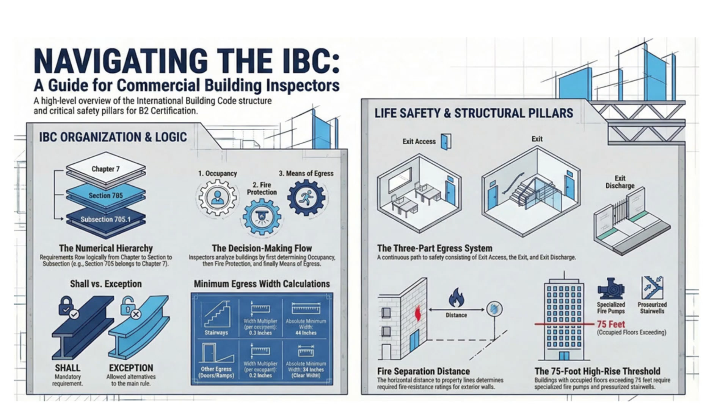The ICC B2 exam is an open book test, a format that creates a dangerous false sense of security. Most candidates walk into the room thinking the answers are easy to find just because they have the book on the desk. The International Building Code contains hundreds of pages of dense, technical language. Under severe time constraints, searching for every answer from scratch is mathematically impossible.

Relying on rote memorization is a direct path to failure. The volume of material leads to information overload, and the clock runs out. Success requires mastering navigation, understanding the logical hierarchy, utilizing the index effectively, and following cross-references.

Mike L. Turner's book, ICC Commercial Building Inspector Exam Prep B2, acts as an operational manual. It is designed to teach the code navigation skills you actually need. A targeted search strategy is vastly more valuable than a photographic memory. When the timer is running, your ability to locate data is the only thing that matters.

The IBC is structured logically. It moves from general planning and occupancy in early chapters to specific materials like concrete and roof systems later. Candidates must watch for language traps. The code uses shall for mandatory rules, while exceptions provide the specific conditions where those rules do not apply.

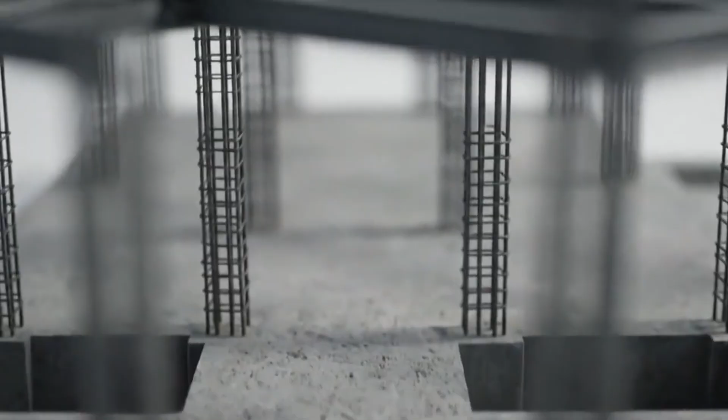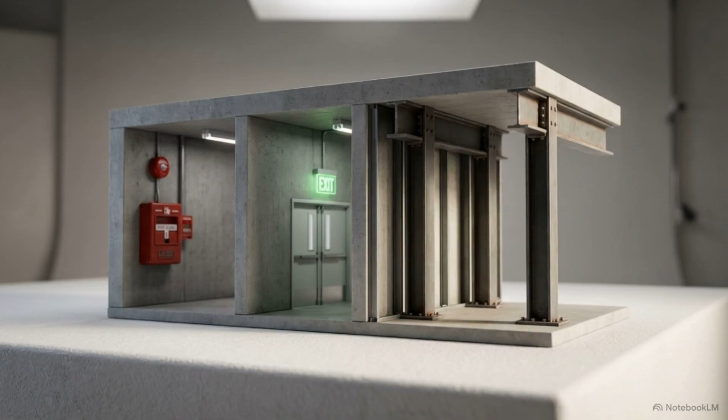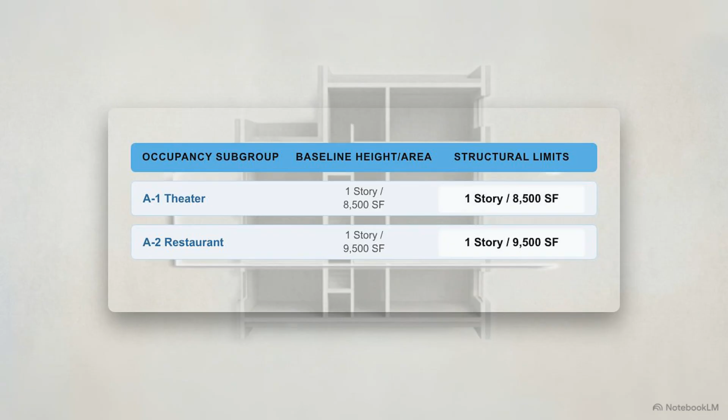Occupancy classification is the starting point for every regulation in the book. It dictates the fire risks, the required exits, and the structural limitations of the building. Small differences in occupancy subgroups can change the requirements. For example, the code treats an A1 theater differently than an A2 restaurant, and those distinctions dictate the structural limits of the space.

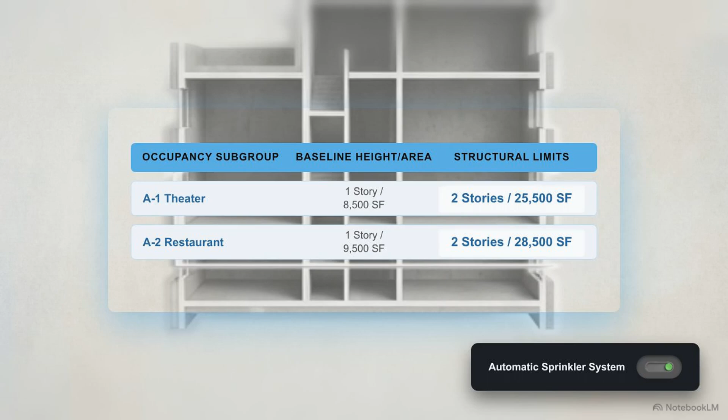Adding an automatic sprinkler system changes the math. This safety feature allows for a multiplier that increases the allowable building height and the total floor area. Calculating these limits requires mastering IBC tables 504.3 and 506.2, which translate the occupancy and construction type into specific allowable dimensions.

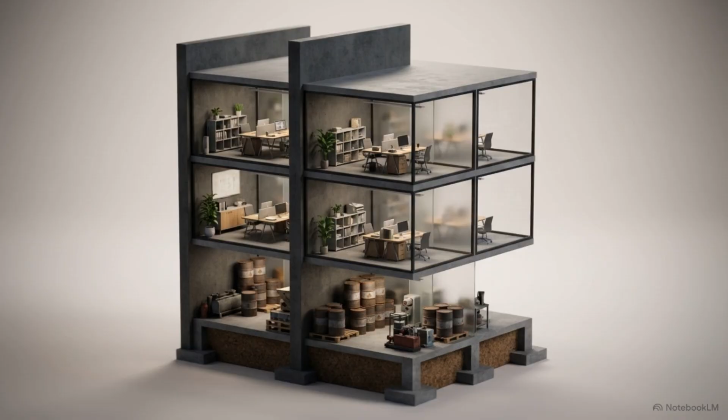In mixed-use buildings, the most restrictive occupancy rule generally governs the entire structure. Relying on field intuition instead of these rigid tables is a common mistake for test takers. Accurate occupancy classification is the mathematical linchpin for every safety requirement that follows.

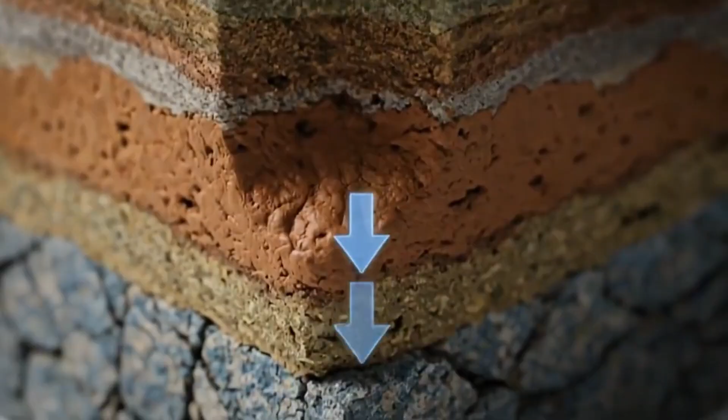The focus then shifts downward to the foundation and the soil itself. It begins with soil bearing capacity, which measures the ground's supporting strength. Designing footings requires using the allowable bearing capacity. This is a conservative figure that includes a factor of safety, unlike the ultimate bearing capacity, which represents the point of total soil failure.

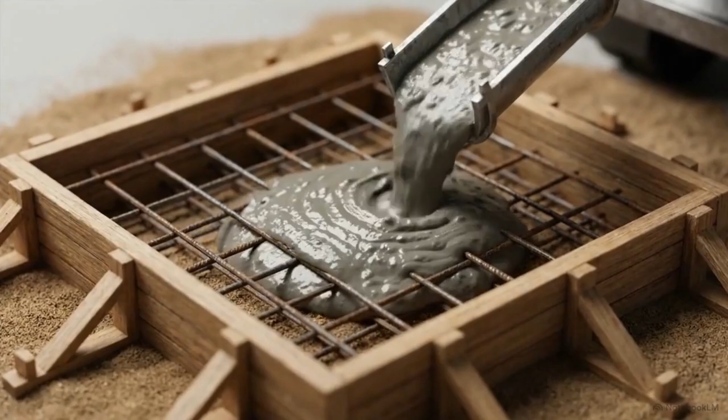Concrete strength is measured by f'c, the specified compressive strength at 28 days of curing. This ensures the material can handle the heavy dead loads of the structure and the variable live loads of the occupants. To pass the exam, you must master laboratory testing standards from ASTM that field inspectors rarely perform themselves. ASTM, the American Society for Testing and Materials, sets the specific protocols for how these concrete samples are cured and tested.

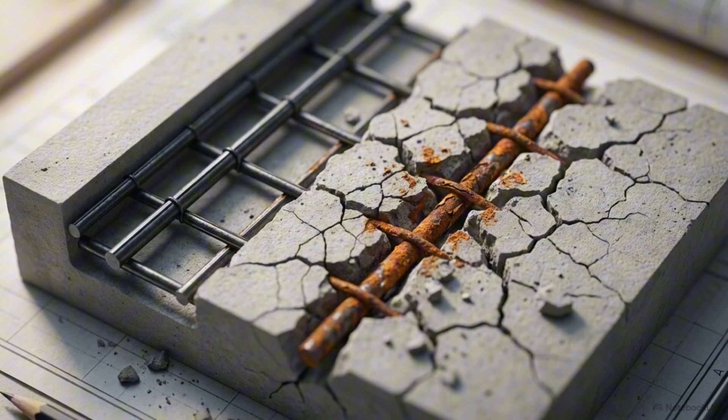There are also strict rules for rebar placement and concrete cover. Proper spacing of the steel reinforcement is necessary to prevent tensile failure and long-term corrosion. Mastering these technical testing standards and soil mechanics ensures a foundation can withstand its design loads without failing.

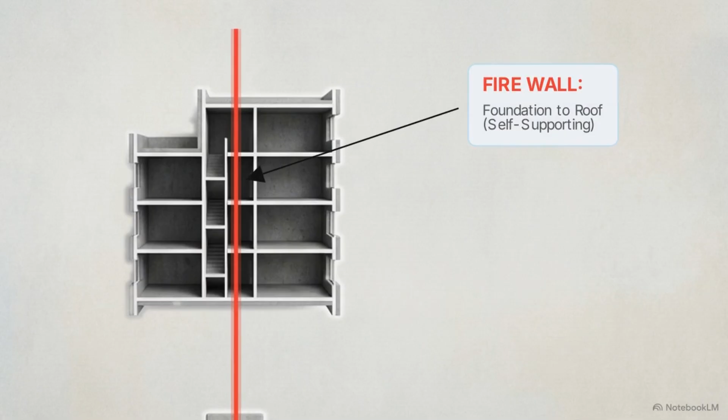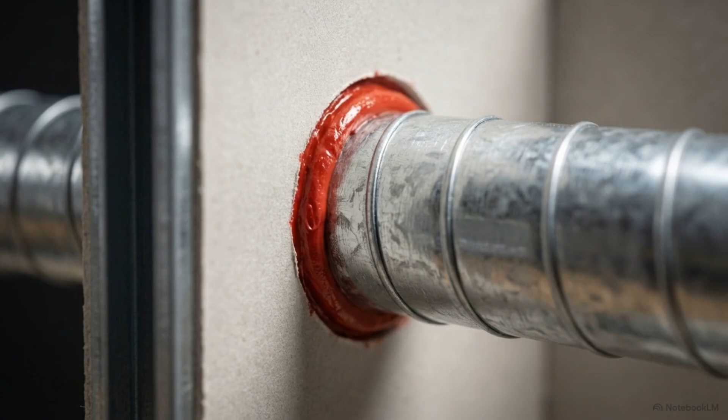Looking at the building envelope, we focus on internal compartmentalization through the use of fire-rated walls. There is a legal and structural difference between these two. A firewall is self-supporting and must extend from the foundation through the roof. A fire barrier is often isolated to a single floor. Every penetration through these walls, like HVAC ducts or plumbing pipes, must be sealed with approved fire-stopping materials to maintain the integrity of the barrier.

On the roof, an inspector must calculate complex load combinations. This requires evaluating dead, live, wind, and snow loads simultaneously to ensure the roof structure can handle the combined forces. A single unsealed penetration or a miscalculated load combination can compromise the life safety system of the entire building.

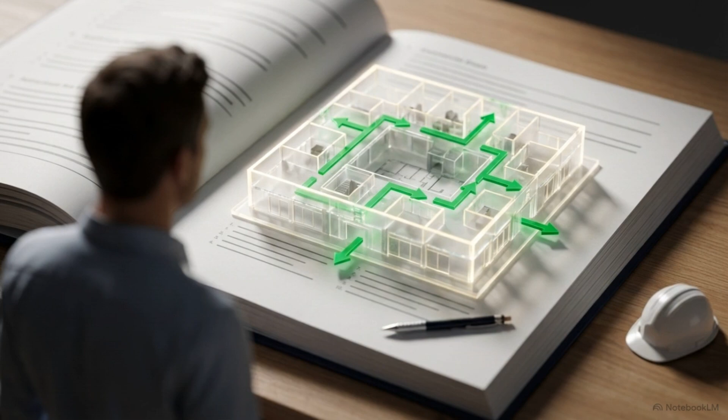For the field veteran, this book translates years of practical construction experience into the rigid legal framework used by the IBC. For the novice, it provides the practice questions and real-world scenarios needed to make abstract code requirements understandable. The book is ICC Commercial Building Inspector Exam Prep B2 by Mike L. Turner. Success on the B2 exam depends on a strategic navigational mindset that allows you to extract answers flawlessly under pressure.